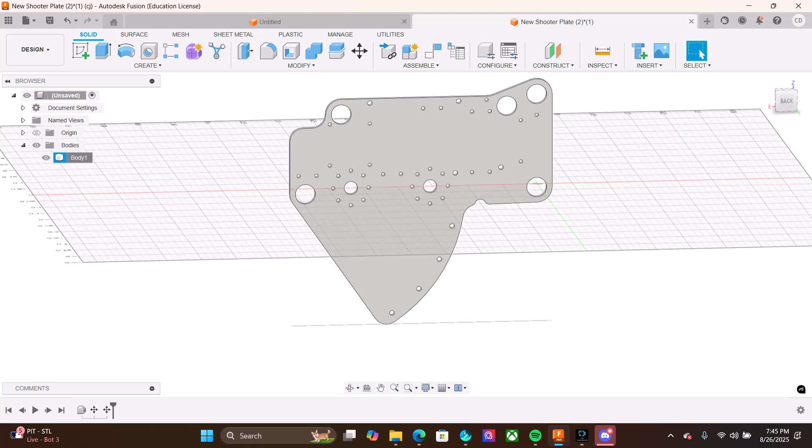Alright, let's jump straight into this. As you can see, this part has a little bit more stuff on it. We have a lot of holes, and you can see that some of them are different sizes. We also have these larger holes, which are also known as pockets. So we're going to get into this.

The first thing you should notice is that this part isn't even with this plane. So we're going to fix that.

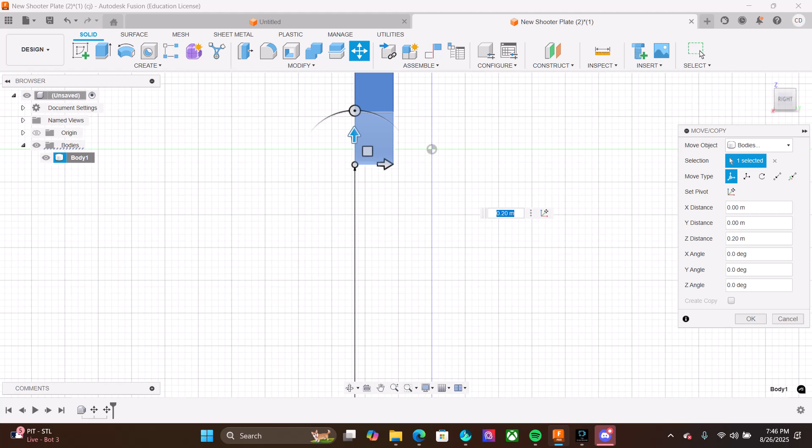We're going to start off fixing that by coming over here to bodies, right-clicking on body 1, and clicking move copy. I'm going to slide it on up so that it's even with this green line you see. You want to try to get it close. It doesn't have to be perfect necessarily, but it's got to be pretty dang close. Otherwise, it could be confusing for your router.

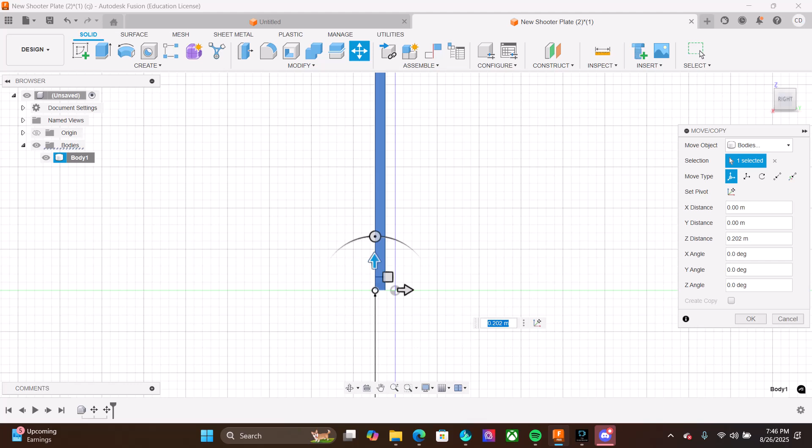So let's just try to get it close - there we go, perfect. Now, as I'm sure you noticed, our pivot point was on the bottom left. So to make sure that we don't ruin the progress we made, we're going to rotate to this side.

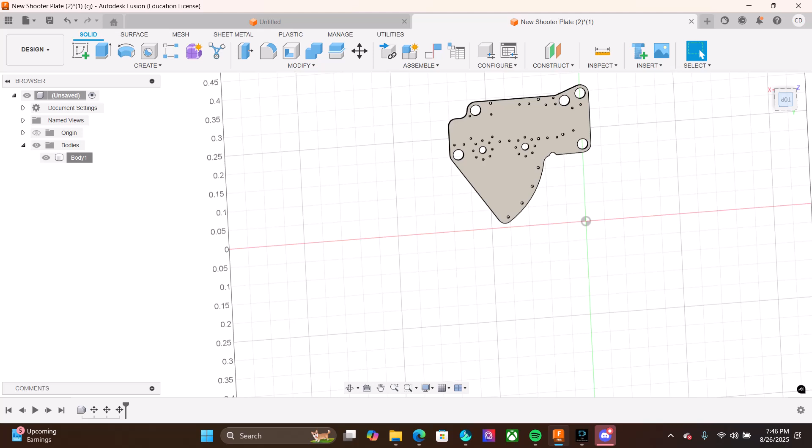We're just going to rotate it 90 degrees. Oh, that's not 90. There we go. And as you can see, it's now flat. Okay, anyways, you can see that's now flat with the plane. And that's exactly what we wanted.

Okay, it's being dumb. But okay, so now our next step is we're going to go into manufacture. We're going to make sure your units are in inches, and you're going to make a setup.

Now, once again, you can see that it's trying to cut a little extra out. We don't want that. We're going to do stock, no additional stock. We're going to come back into setup.

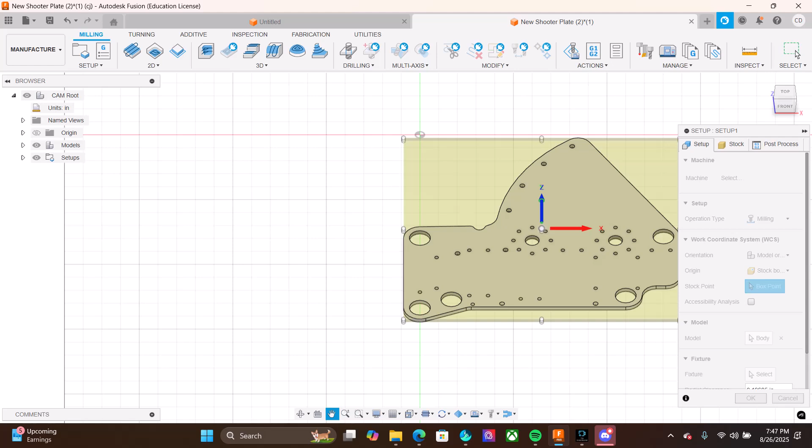Now, as you can see, this part's kind of weird. It's got a bunch of angles and stuff on it. So how we're going to take care of that is we're going to go to orientation.

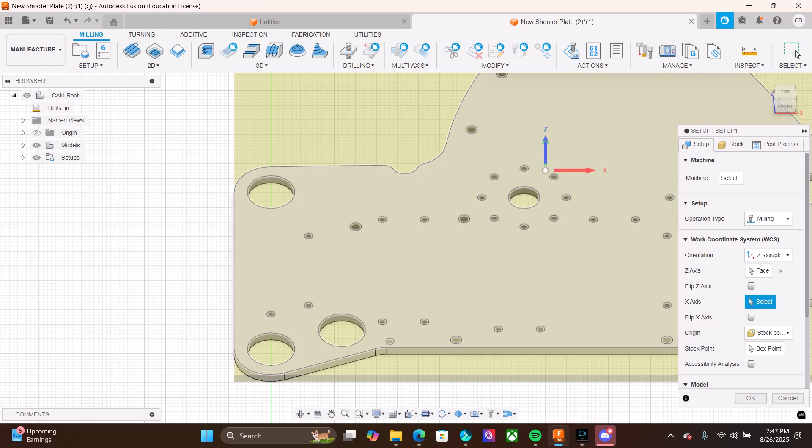Like always, we are going to use a Z-Y axis - actually, no, let's use the ZX. And the reason why we're going to use the ZX is because we're going to select our Z on this face. You can see that I have a face selected. And then the X is going to be on this side. So now our Y is going to be going this way. That's exactly what we want.

And the reason we want that is because, if it'll let me - there we go. The reason we want this is because you can see that's a little bit longer this way than it is wide. Now, I may just be delusional, but that's what I see.

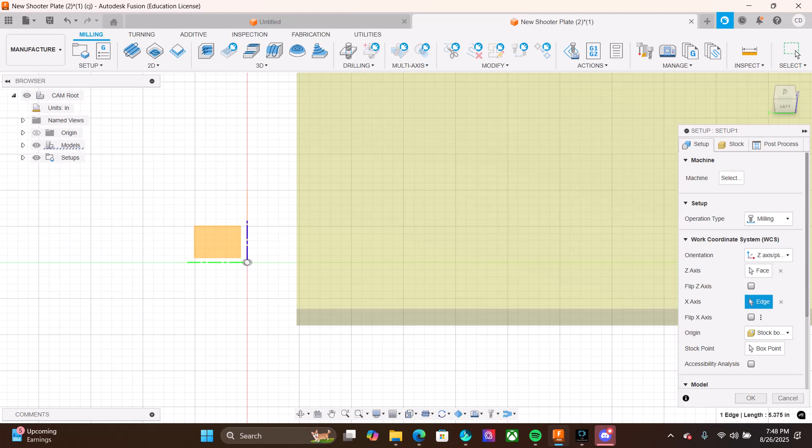And then we're going to take our box point and put it bottom left. You can see all the arrows are already facing the right way, so we ain't got to do nothing else. Click OK. Wait for load because it's dumb.

Alright, next we're going to do our bores. Now I'm kind of speedrunning through this because I already did all this stuff in the last video. So select same diameter. Select.

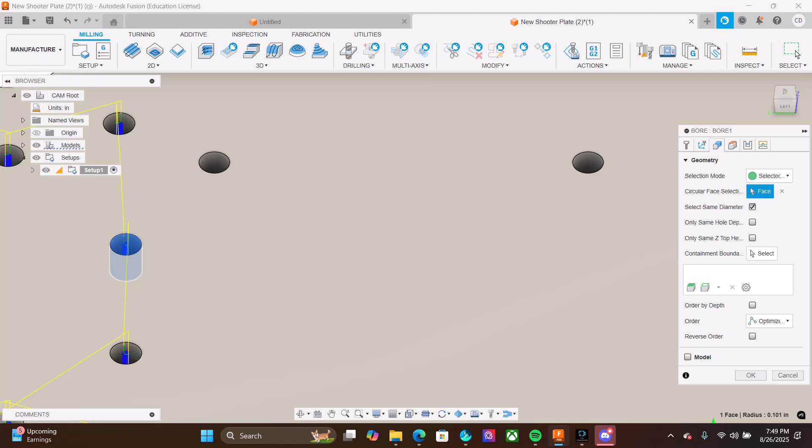Where's my tool? Here it is. There we go. So you can see it automatically generates the path.

We're just going to leave it because honestly, if you're sitting in that room, you're not going to have time to really mess with the order that you want it in. It says down here, technically says optimize order. Clearly, this order doesn't look very optimized though. As you can see, it's like jumping around. It's not just going from spot to spot. It doesn't really make any sense.

So we're going to do, once again, negative 20 thousandths. And then also be sure that your preset is set to bore. We don't need to do any of this because it's a bore and we don't have to mess with any of this. So we're going to click OK and move on to the next step.

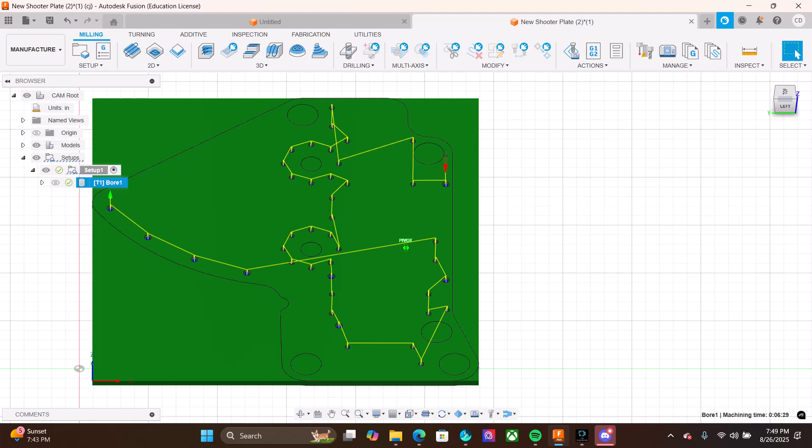Alright, now we're going to do these guys right here, these circles - these open areas right here. And how we're going to do that is we're going to use an adaptive clearing.

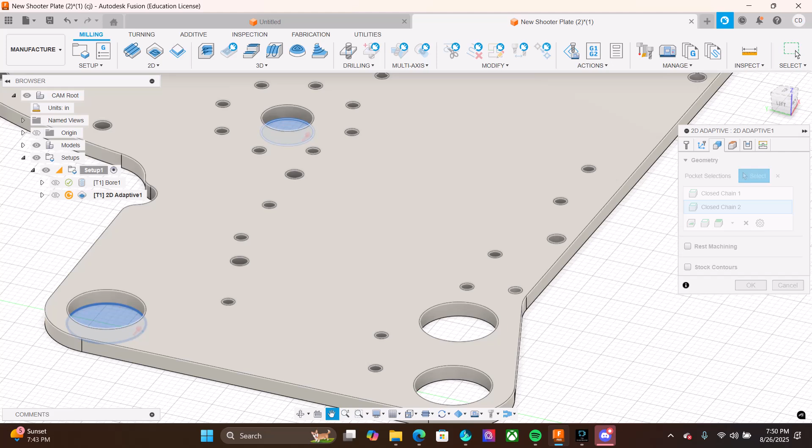Now the reason we're going to use an adaptive clearing is because it's adaptive. I don't actually know the reason. I'm making stuff up. If you want to know the actual reason, talk to Emerson. He explained it to me once. I just don't entirely remember.

We're going to select all these bottoms, just like that. Notice how I selected the bottom of the hole and not the top. If you select the top of the hole, it'll think that that's the bottom of the stock, and that's where it needs to get to. But in reality, we want it to get to the bottom, obviously, because otherwise we won't have a hole.

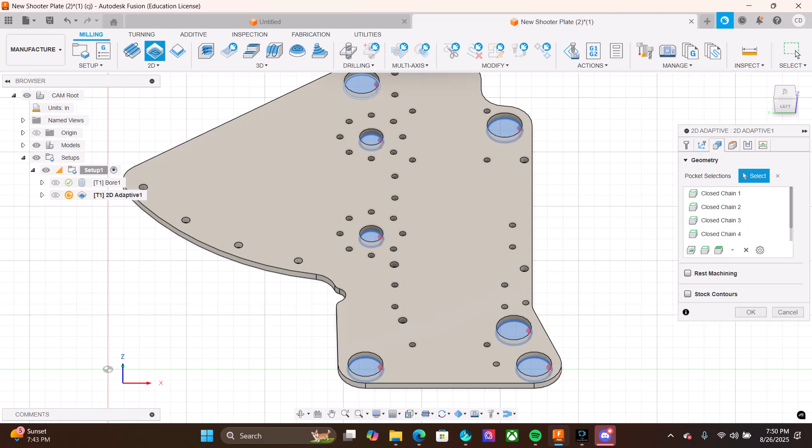All right, so heights - negative 20 thou. Nope, that's wrong, sorry. 20,000. Make sure you have your tool selected. Typically, it'll automatically select. If you selected it for your bore, it'll be automatic for this one.

Now we want feed optimization, smoothing. You're going to turn off stock to leave. We don't want stock to leave on. And we're going to turn on multiple depths.

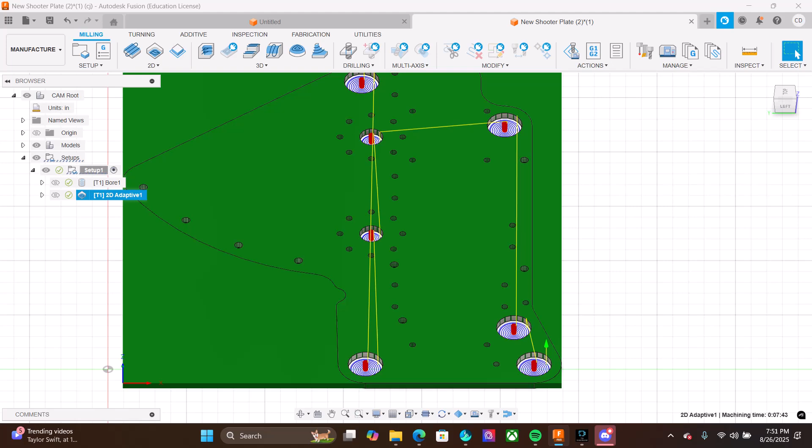Something I didn't mention in the last video: if you click on it so it shows up down here in the bottom right, it'll show you how long this will take to cut. This number isn't completely accurate because it only involves cutting time, not the time moving between the different holes.

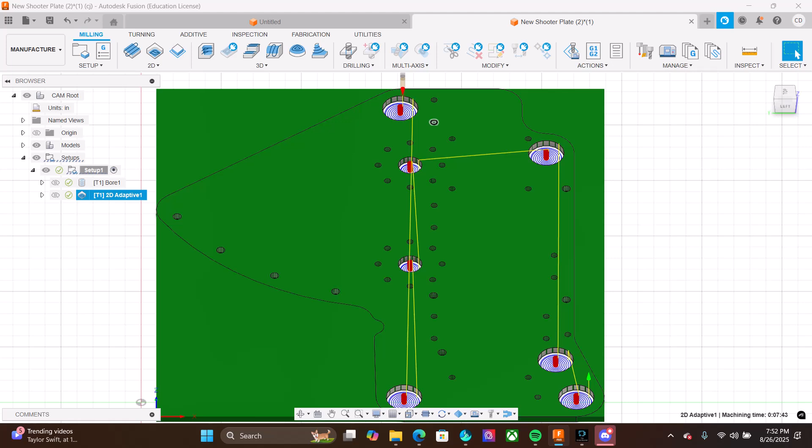Now that we have our adaptive clearing done, the next thing we want to do is try to get these holes as close to where they need to be as possible. We're going to do that using a contour. Essentially the contour just takes a little bit off around the side and it's done. By doing that, it fixes the problem of having flex in the bit.

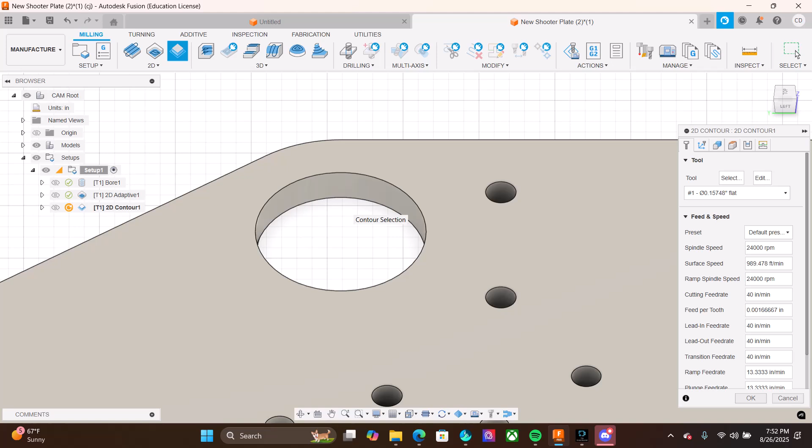Flex is exactly what it sounds like. While you're cutting, the bit flexes a little bit away from the metal, and that causes it to not get to the full size. So I'm going to select the bottom of each hole.

Make sure I got them all. Yep. Again, we're still going to use the negative 20 thou. And on this one, you will use the same setting that you would use for the outside, because we don't have a different setting set for that. We've never made one.

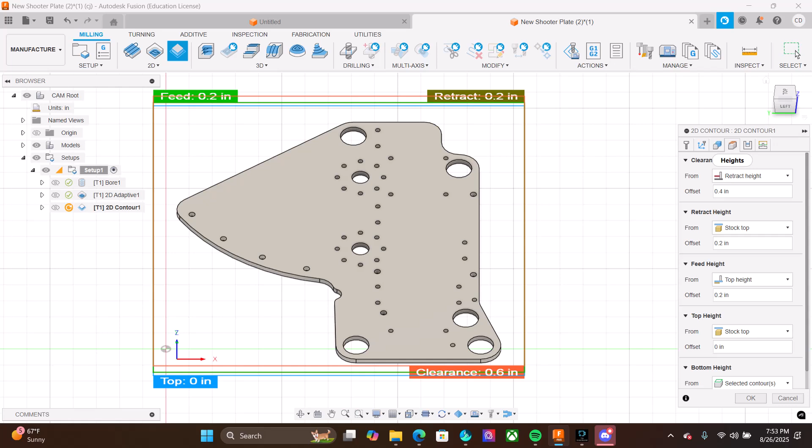So we're going to do feed up and smoothing just because it makes it a little bit better. You do not need multiple depths for this because there's not really any point. You can see this time it did actually do a pretty good path, but it doesn't really matter that much. We're not trying to optimize this, we're just here to teach you how to do this.

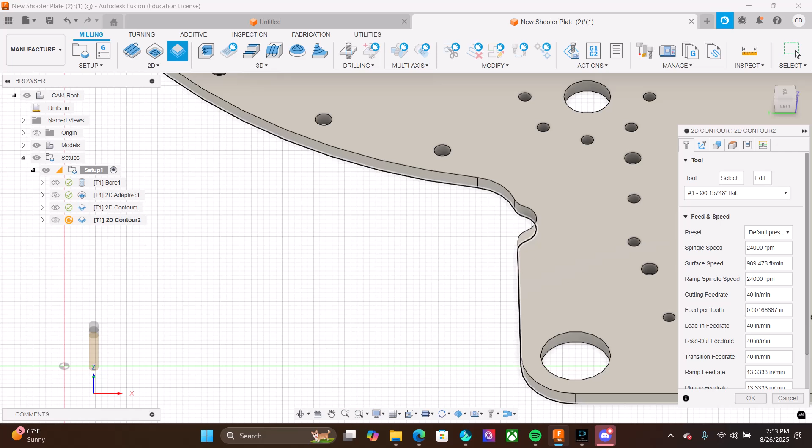So the next thing is we need to cut out the shape. Once again, we're going to use a contour. We're going to select the bottom. Make sure that you have this set to contour because it'll be slow enough to work. Negative 20 thou. Feed up, smoothing, and we're going to do multiple depths because it just takes a little bit of load off.

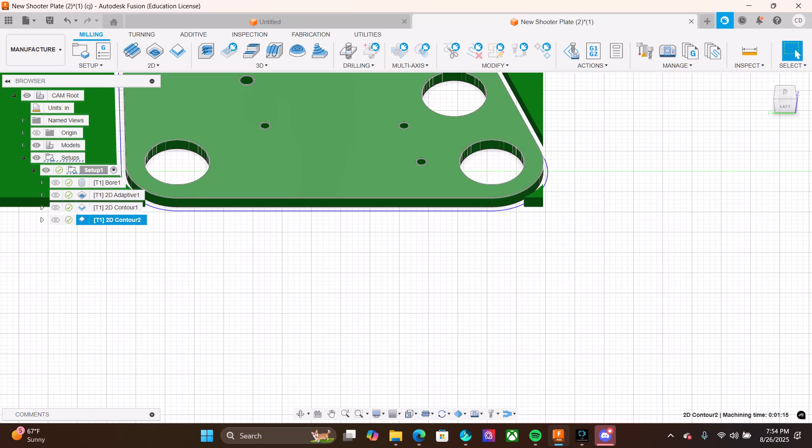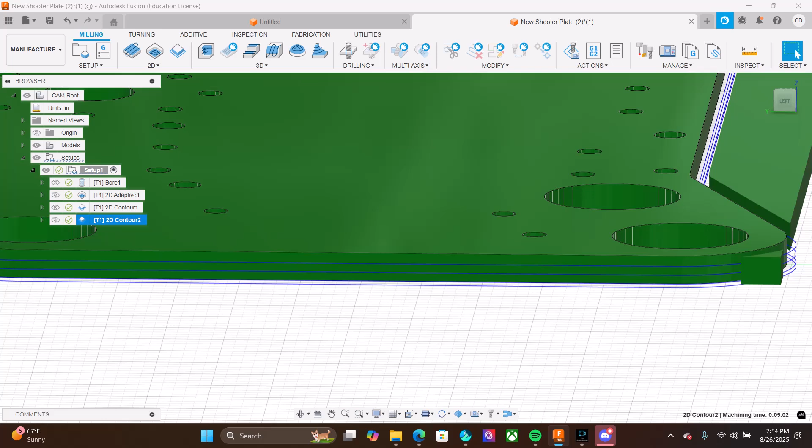So when doing multiple depths, if you zoom in, you should... I don't know why we can't see it here. It must not have worked. Oh, that's too many. I can't, let's see here. Let's see if we can remember this number. Oh wait, was it supposed to be 70? I'm trying to remember the number. Oh, let's do too many.

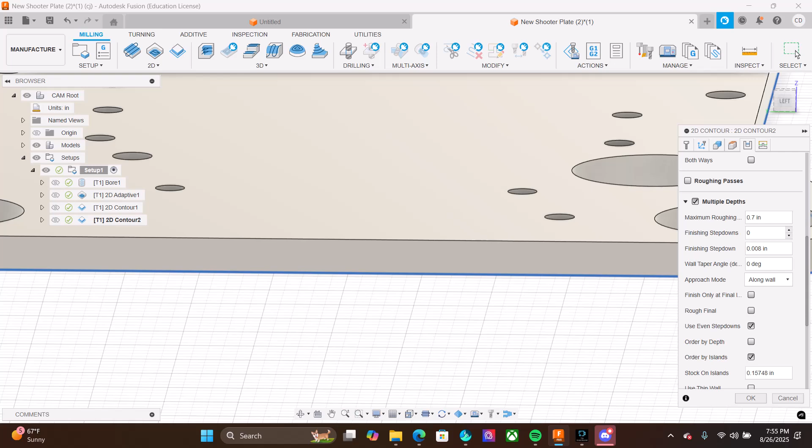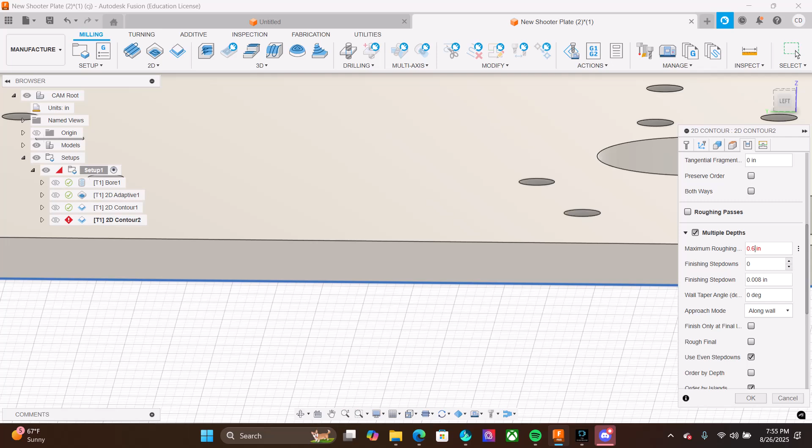Alright, well, I can't seem to figure it out, so whatever it is, you should be able to see two lines, and that's all you really want. You don't want to do a ton of passes because otherwise you're just wasting time. Okay, I have no clue what's going on. I think I just have the number too high. Yeah, okay, I have no clue what's going on, but since it's not going to do multiple depths, we're just going to turn it off just to make sure I don't break anything.

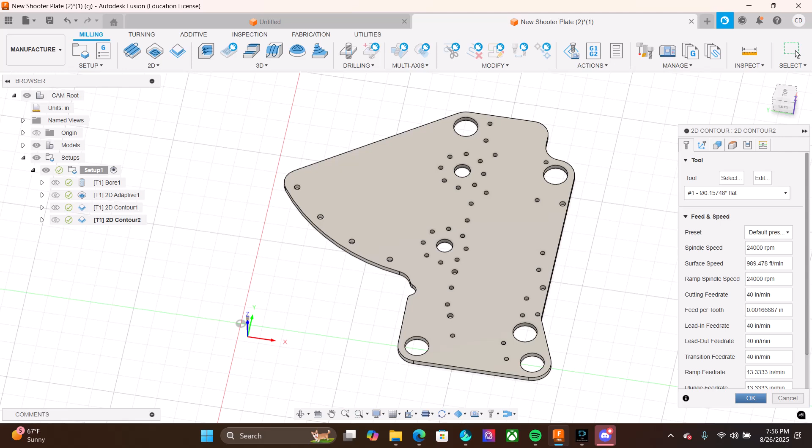So now you can see. Okay, one more thing. Since we're not doing the multiple depths, you're going to want to actually do the cutting feed rate a little bit slower. You're not going to mess with it here, you can mess with that on Mach 3. But that's just a little word to the wise, because running it slower will also reduce load on the bit and will increase your bit life.

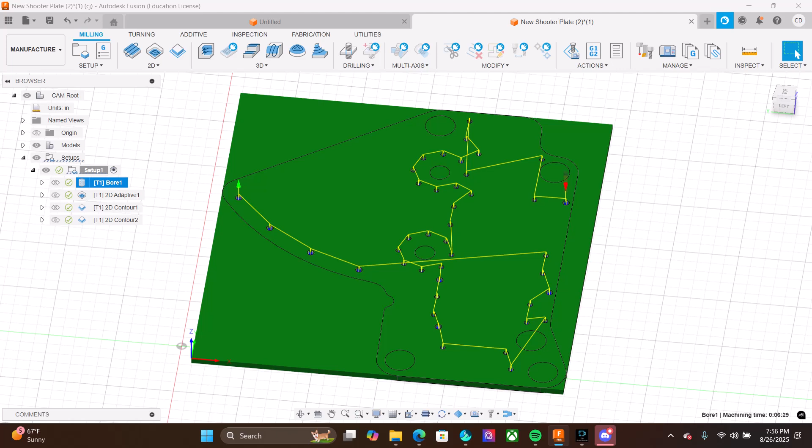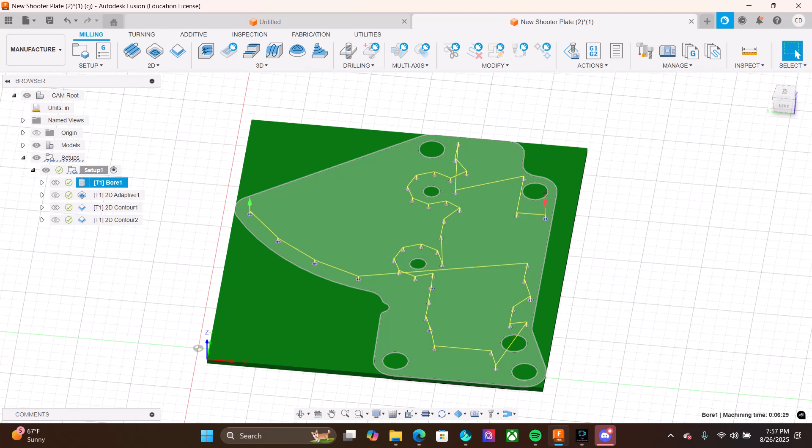So as you can see, we have way more operations here than we did last time. We always put the bore by itself, under one condition. If you're expanding the top, let's say half of the hole, but leaving the bottom half empty, that'll be two different operations. So in that case, you would have more than just the bore, but in 90% of situations, you will have the bore by itself.

So we're going to call this whatever, bore. I'm just going to call it bore. Make sure you have it in the right drive. Make sure it says tap, CNC, and post.

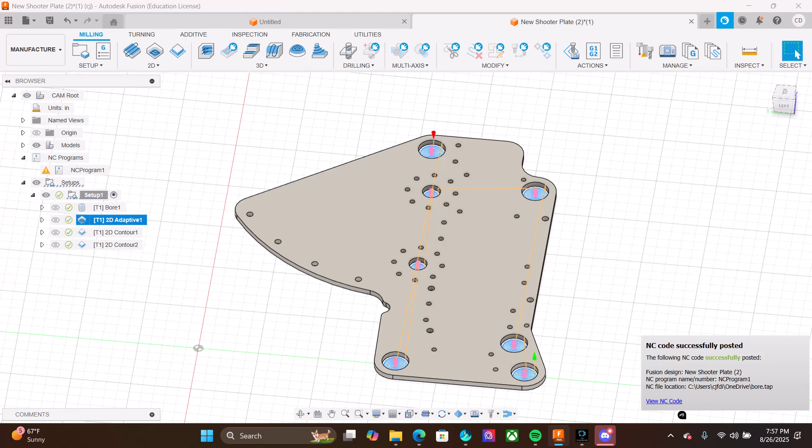Now, once again, if we click here, hold Control—oh, nope, sorry, I guess it's Shift—and then click here. There we go. So hold Shift, click there. NC program, this we'll likely call rest because it's the rest of the stuff. So you can see same drive, tap, CNC, post. And that's all there is to it.